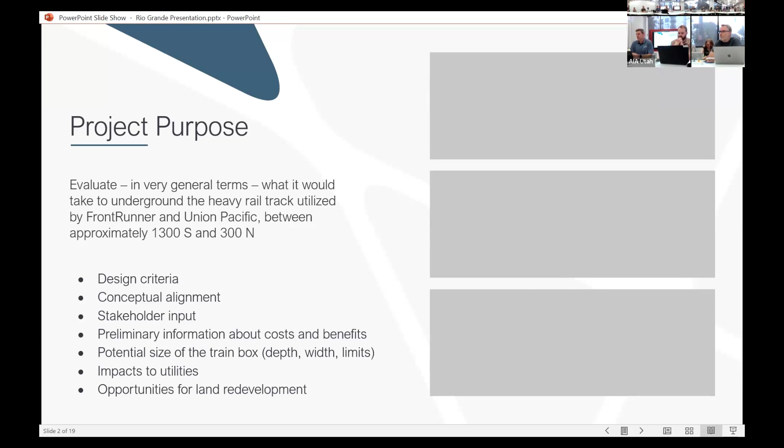The purpose of the Rio Grande Plan, originally as published, are stated here. Number one, improve east-west mobility. We know that that's an issue. Salt Lake City is working on that. They have some upcoming projects to help address that, not only through this potential project, but identifying a variety of improvements, whether it's grade crossings, enhancements to transit, active transportation, connectivity, et cetera, trying to bridge that east-west barrier that can be I-15 and the Union Pacific Railroad.

Another big purpose of this, if you've looked at the data, the number of pedestrian fatalities and serious injuries is at some of the at-grade crossings because of people trying to cross. They get impatient, they don't see the trains, and there's been some fairly catastrophic fatalities over the past few years, and that we seek to address, whether it's through this type of a project or other improvements that Salt Lake City will be considering through an upcoming grant they received called the Reconnecting Communities Grant.

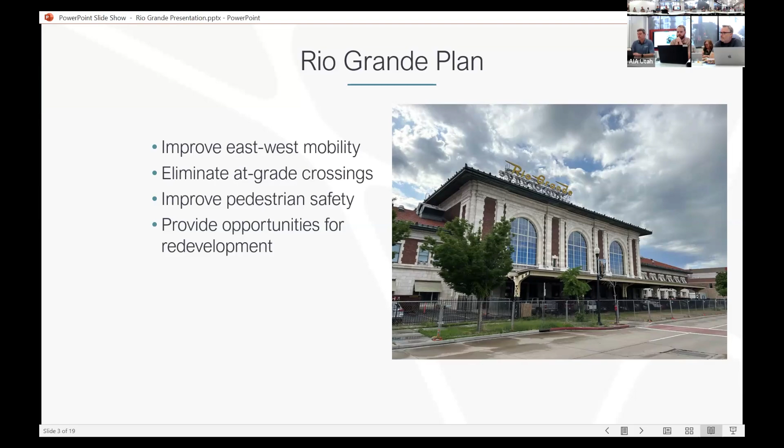As you are aware, the Rio Grande Plan did propose to what we call train box the Union Pacific and FrontRunner Railroad. And this is an exhibit from that Rio Grande Plan, starting approximately at 9 South, where the railroad takes a bend, entering the Granary District, et cetera, then approximately along 500 West. And then the Rio Grande Plan exhibit went to, I believe it was about 300 North, if I recall. Yeah, it remained below grade until about 100 South, and it rose up to meet at North Temple, so North Temple Station didn't have to be altered. Okay. The idea was to not interfere with east-west freight traffic.

Yeah, and so our analysis actually extended those limits a bit based on UTA and Union Pacific design criteria. So we go from about 1300 South to 300 North. So adding north and south, but that is to accommodate some of those other design criteria that the Union Pacific would require. You can see some of the new benefits here.

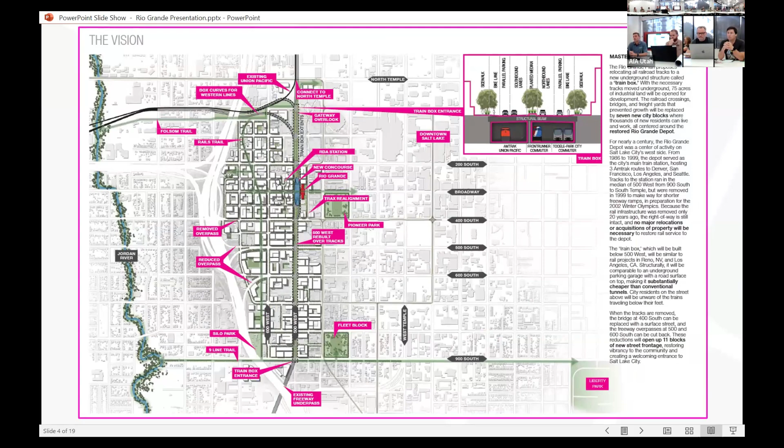A key component of the Rio Grande Plan is to revitalize or enhance the importance of the Rio Grande Station as a central transfer point between light rail, FrontRunner, transit, et cetera, and really restore that to its previous glory and heritage. This is another close-up of that Rio Grande Plan. You can see the historic rail corridor that we yanked out several years ago in the black, and then the pink is the current Union Pacific and FrontRunner corridor. And the Rio Grande Plan would largely restore the railroad back to its original historic alignment.

Well, which street is that black on? About 500 West. Okay. Yeah, so it's just west of the Rio Grande Depot right here, so it's the block west there. Proposed train box. And that's where the proposed train box. I actually didn't know that those existed, right?

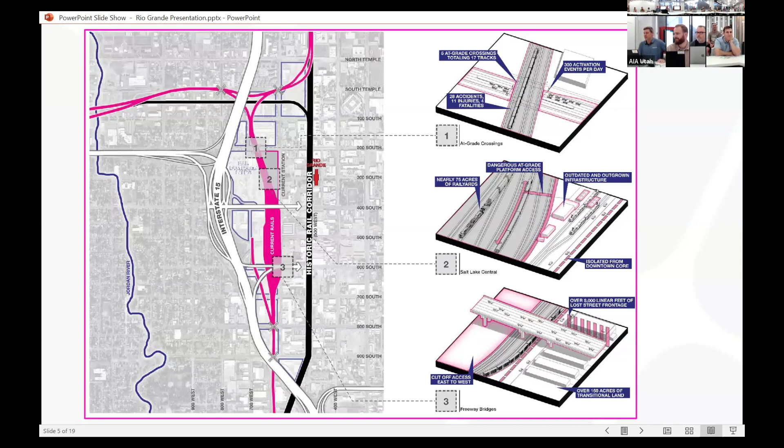Got it through the years. Okay. It was before I was born also. Okay. So, long time ago.

Some of the example projects where they've done this before are identified both in the Rio Grande Plan, and we did some follow-up example projects. People often cite the train box in Reno, Nevada, which undergrounded the railroad. There's also a similar concept in Southern California, the Alameda corridor.

And then if many of you have been to Denver, you've also seen that they had an investment there with their Union Station. So there's examples of how this has been done. Many of you cited in California how they took out a freeway, also contributing to reconnecting the communities. The purpose really is to bridge the divide that our freeways and major railroad corridors can provide. They put up a wall essentially that is very difficult to permeate.

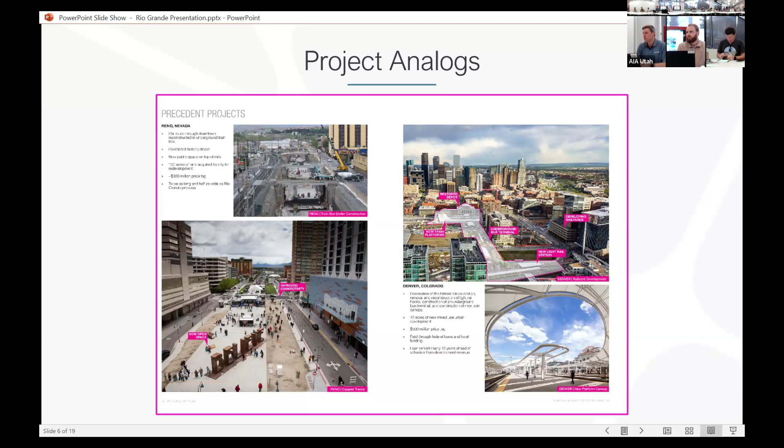A little bit more about what the existing conditions are on 500 West, where this corridor would be restored to. We divided the corridor into two segments: a north segment and a south segment, roughly divided there at the Rio Grande. Unsignalized intersections 9, signalized intersections 4. Residential access points 16 along the length of the corridor, commercial access points 35. At-grade railroad crossings 11, and then 8 overpasses or bridges.

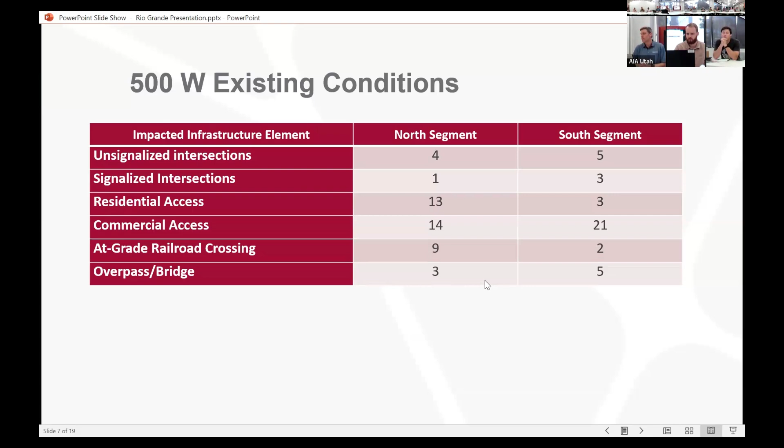These all need to be considered. It's just not as easy as digging a big hole and putting the railroad underground. We still have businesses that have been constructed with their frontage to 500 West. Unless we're looking to redefine those configurations, which is quite difficult, we need to figure out how to accommodate the access to them as well.

This is an overview of the north and south segments. The pink was the original train box limits. The orange is our extension to account for the vertical grade that needs to happen to be able to get a railroad up at the 1.1% grade, 1.5% grade that is required by the Union Pacific, so they can continue their freight movements, et cetera. You can see some of the other symbols there, the at-grade crossings, bridges, existing major access points, existing signalized intersections. We also have that for the south segment.

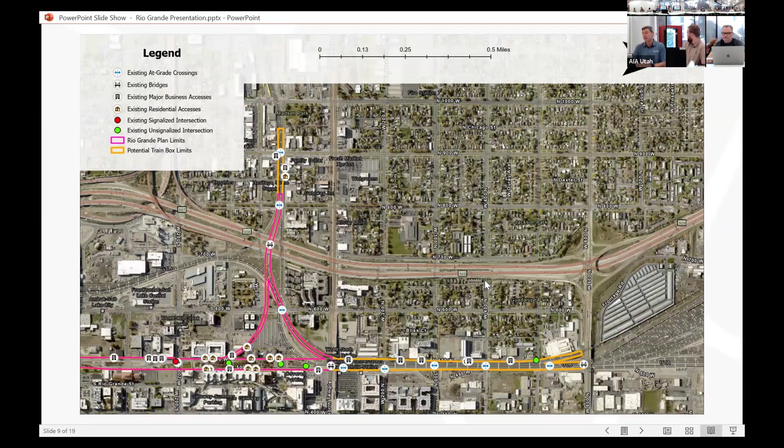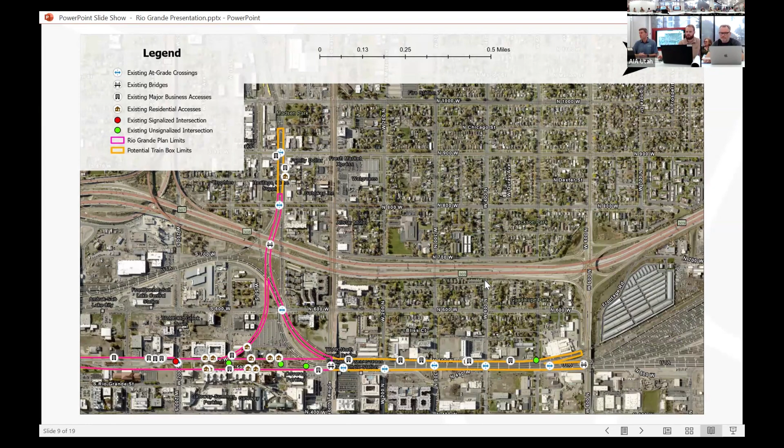Another consideration that we needed to accommodate is the train box would not just extend to the north, but it would actually extend to the west because of our spur line that is headed out just south of North Temple, accommodating freight traffic there. So you can see that pink is undergrounding to there, and then we come up grade where that orange line is showing.

We tried to keep the horizontal crossings basically flat with the existing street system, so we didn't have to go up and over, so you minimize the impact to the adjacent land. So it's basically straight across. If we can get the train boxes to that depth, then we don't have to go over. We can just go under with the train box.

Another key component I'll add to that depth is utilities in the area. When we talked with Salt Lake City Public Utilities, there's some really old, large sewer lines, water lines, gas lines, all sorts of things crossing there. And you just need to get deeper than those. They're still probably going to be in the train box when it's built, but you need to allow for enough clearance, so that pushed it deeper than probably originally thought as well. And we'll show you some exhibits that illustrate those utility solutions.

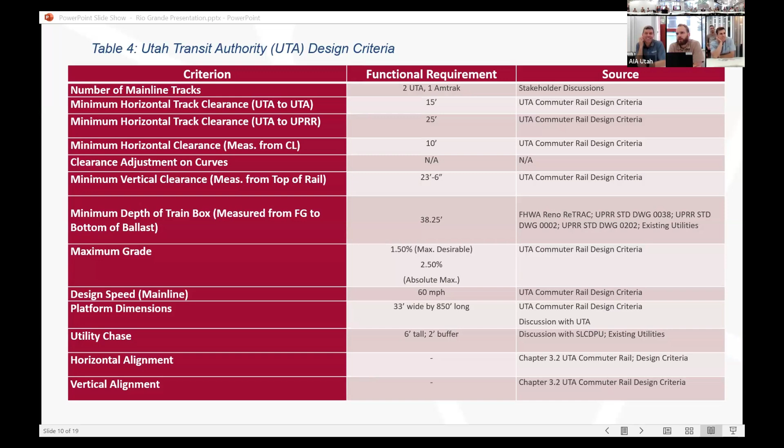Yeah, it's undefined, but it was brought up by Union Pacific. It was a concern. There was a lot of concern of, even if they were to store their trains like they currently do in the box, what the exhaust implications would be in a structure. You've got hot exhaust coming from these trains. Can they actually stay underground for prolonged periods and not cause problems to the structure?

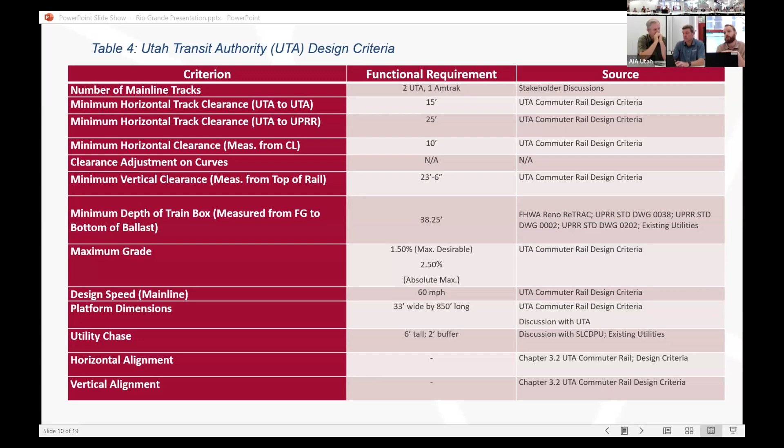As well as hazmat, what would be the plan if you were to move hazmat through the train box? What would be the cleanup protocol? It's not defined, but it was things that we discussed with Union Pacific, and it added to their skepticism and their concern for whether they were open to putting Union Pacific through this.

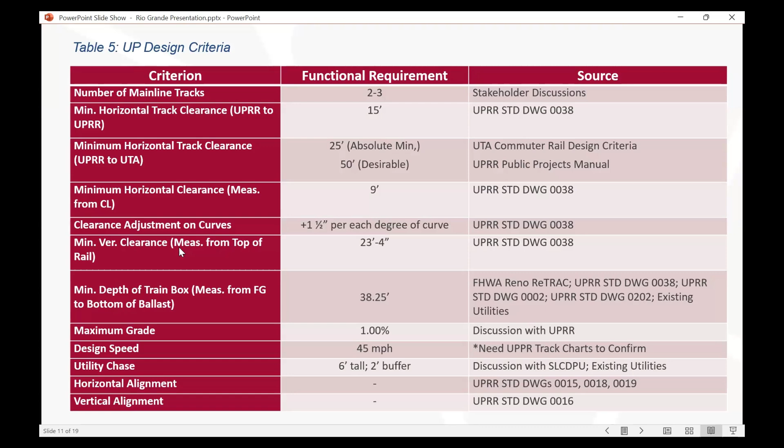I don't mean to belabor, but they already have a 10-mile one in LA. Just curious. Yeah, part of it too is that you're sharing it with passenger rail. The Alameda corridor, as far as I understand, is only freight. Oh. And you may be more familiar, but it's generally open, it's not capped. It has crossings. It's sort of open, but it's also capped in some places, same as Reno's. Same story, and Reno's does have trains.

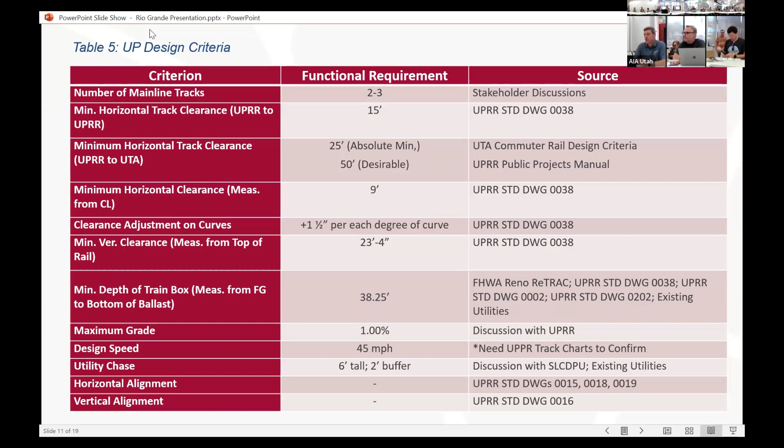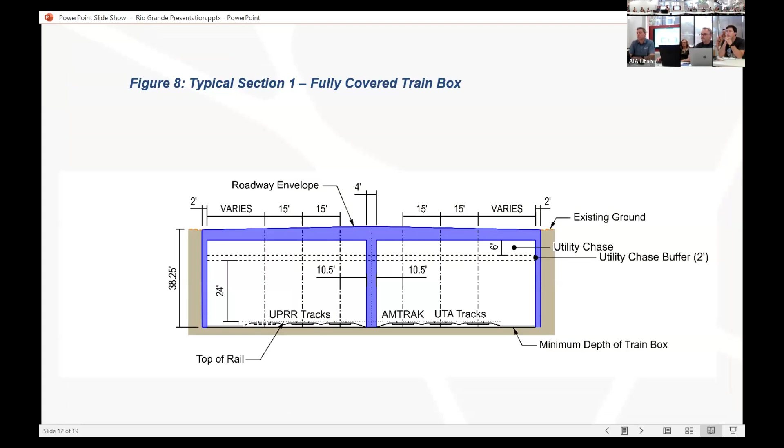You want to go through cross sections? Sure. You want to come along there? Yeah. So we're gonna shift to Theo, and he's gonna walk us up and down the corridor. We have a roll plot map. We didn't know how many people would be online or in person, so we brought a roll plot that, if you're wanting to look at it on paper format, we can lay out. Probably right here.

Sorry. Theo's gonna walk through it. And unfortunately, our plotter midway through had a midlife crisis. Yes, exactly. It's easier just to call somebody and have them plot it out, right?

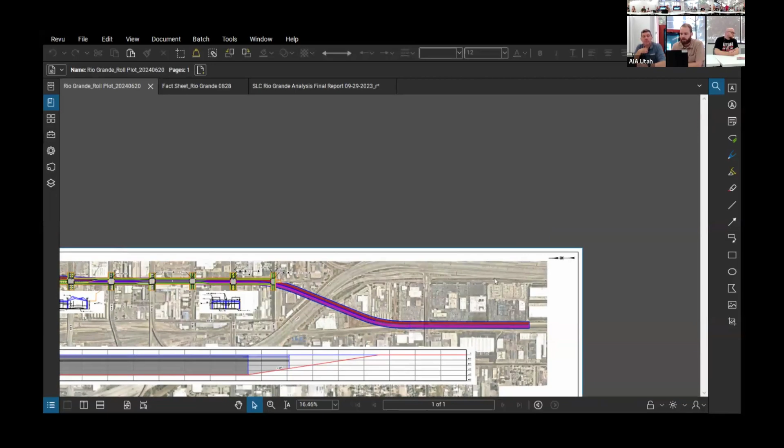So it'd be way down over there. Okay. So Theo's gonna share his screen, so we want to make sure we don't lose the online folks, walking through this. So we'll continue. Yeah, let's start on the south side, which should be over here. Yeah, sorry, north is to the left on this plot.

So again, like Brent was saying, Union Pacific, I think the profile in there actually shows 1.5%, but that was revised to 1%, which was a big contribution to the extension further south to past 1300 South. Unfortunately, that's the part where the plotter, so you guys can look here to kind of see the dark portion is open. Open train box. Tried to maximize that as much as possible, mostly for ventilation reasons. This is the less interesting section, but I can show you really quickly.

The alignments, the two red are UTA FrontRunner, the purple is Amtrak, the two pink solid are Union Pacific, and the dashed pink is future Union Pacific. So in total, 6 tracks. Those are center lines of the track. And you can see that one of the more strict criteria that Union Pacific requests is distance from third-party rail. So you can see the distance between Amtrak and Union Pacific is the largest there.

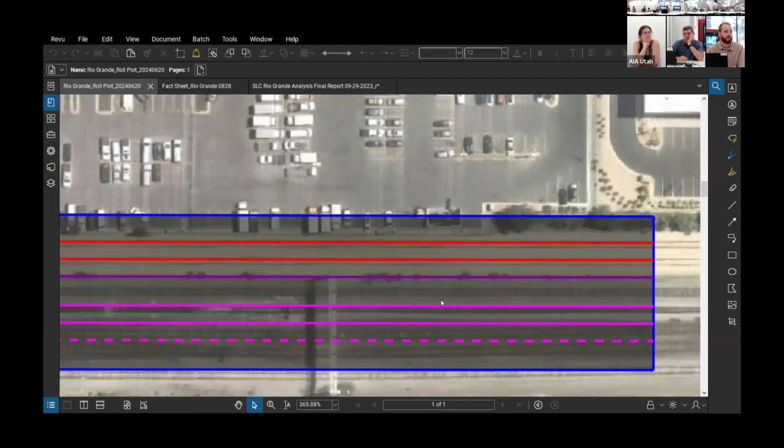And even what we show here is below their desirable amount, which is 50 feet. But 25 is something that they have in urban areas. So we thought it was fair to show that, because 50 just simply wouldn't. Well, you could put the future in the middle or something, so then it has 50 feet, if they want to go down. Yeah. Go ahead. I don't know, sorry. And that's their...

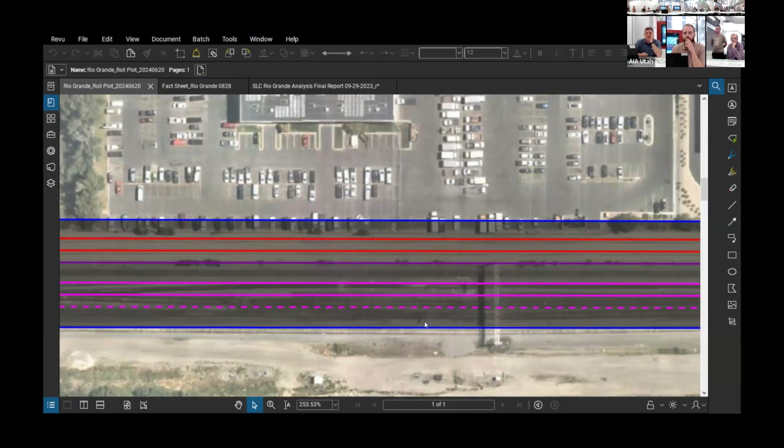And that's obviously their desirable. Are you seeing in the research that there have been exceptions made? Yeah. In existing, they have exceptions to that. Like we were saying, I think those come down to case by case, discussing with them. But they wanted it to be clear what their desirable criteria is, and that's what we have shown on the table.

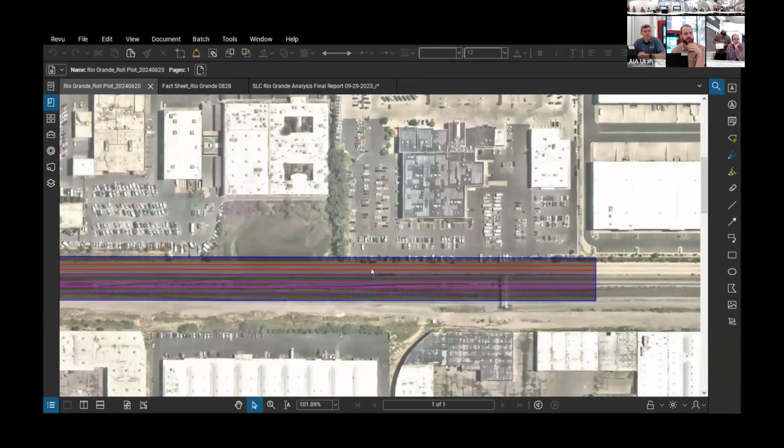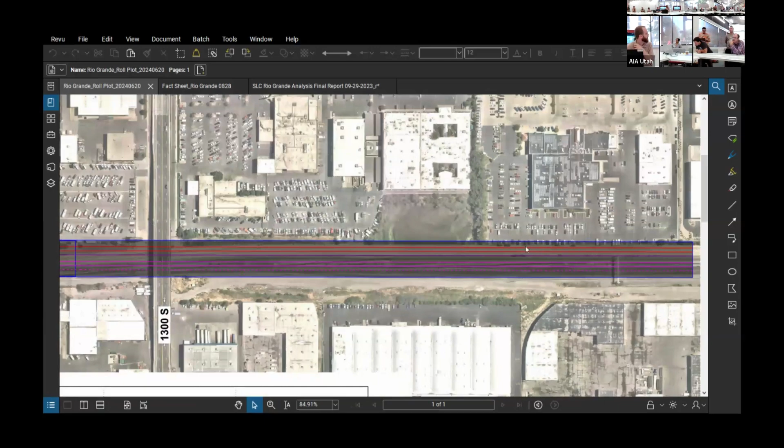Are your blue lines intended to stay in rail right of way, or is that? This doesn't show right of way takes. There are sections that go beyond existing rail, for sure. But for the most part here, with the exception of a few small parking lots, it works mostly in rail right of way. But it is very wide.

So as we go through here, this is kind of the first pinch point, that underpass under I-15. We didn't look super closely at what kind of reconstruction work would have to be done there, but definitely something would have to be done to accommodate that. Again, it is going down at this point, so there is a bit of clearance. It's the width of the abutments. Yeah, but you could theoretically, again, this goes into general versus specific, start with the box being smaller, and a separate I-15 revitalization could expand the box, right?

So as it approaches 500 West, we have some substantial property impacts here, which again are not really shown on this plot. There was just a lot to layer in, so I thought keep it as simple as possible. And this blue line right here indicates where it's full depth. So this is where it starts going down. This is where it's deep enough to be covered, but it's not covered in this section, and then this is when it's full depth.

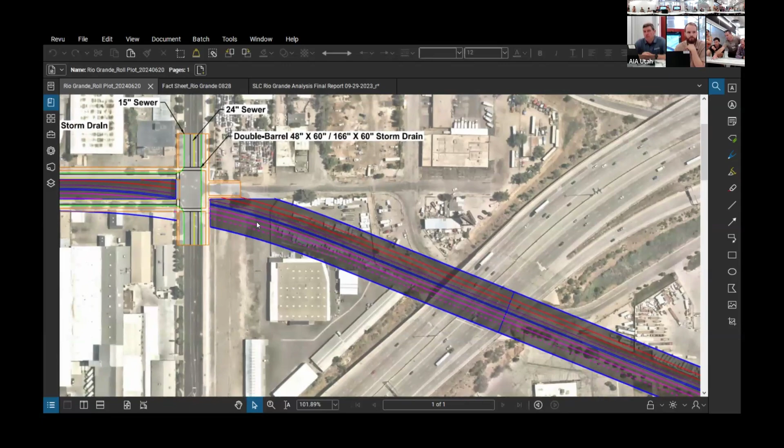And as we get into this section, you can see that lighter hatch, that white indicates at grade, like road grade. So these are those intersection caps we were describing. They would have to go over the box. And as we advance this, we wanted to maximize the amount of ventilation. So you can see the tracks are shown through that roadway cap. Each one of these would have to be reconstructed, similar to how they are on the Alameda corridor. We looked really closely at the way they had those intersection caps. And it's kind of similar to Reno, I assume, as well.

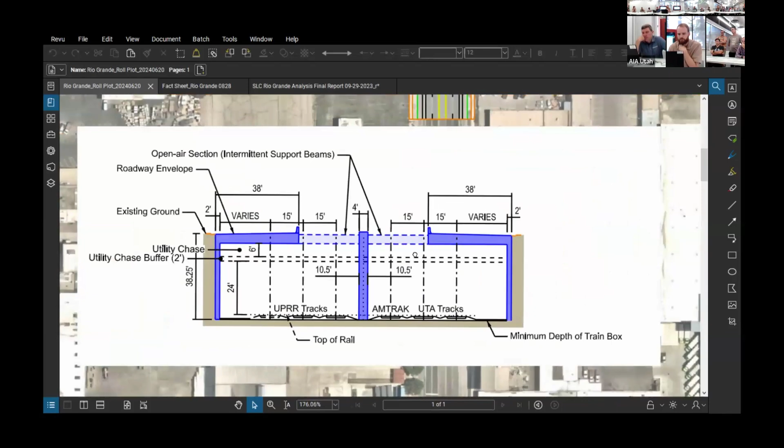These callouts are just drawing attention to some of the bigger utilities crossing in the area. Are those two intersections 8 and 900 South? Yeah, 900, 800, 700 South. So maybe pause, zoom in on that cross section. Oh, yeah. So real quick, 700 doesn't actually go over the tracks right now. So that creates a brand new intersection and connectivity between all these sides.

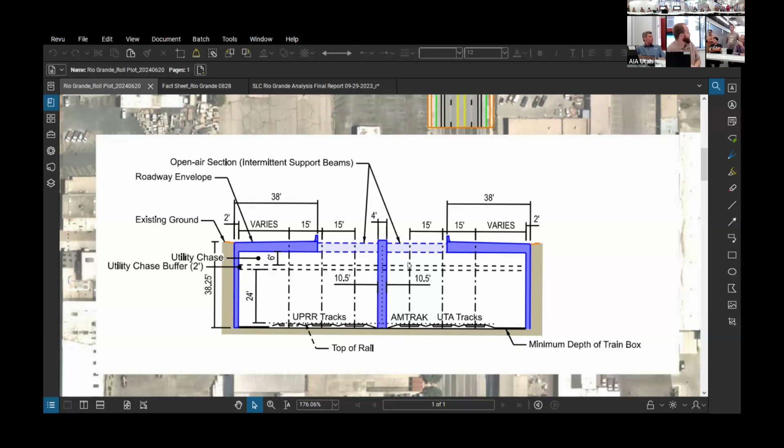So yeah, it's not a specific cross section at any point. It's kind of just general of what this kind of section would look like at the full depth. You can see there in the darker blue is kind of the roadway envelope of where we would keep existing traffic movements on 500 West. That dashed section in the middle is where it would be open air.

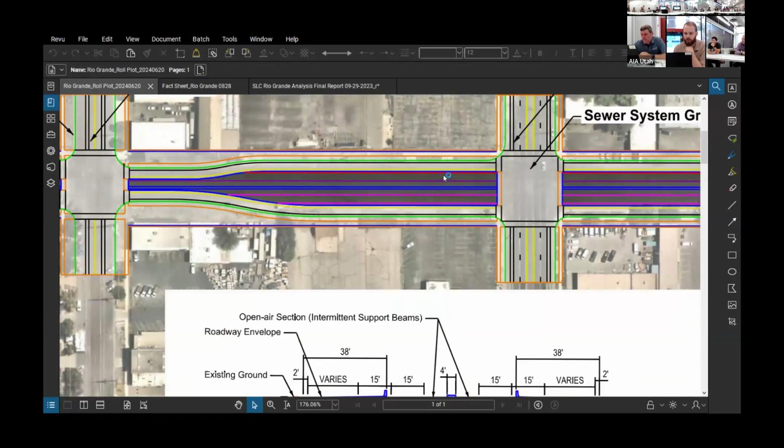We don't have it shown in the plot here, but it would have intermittent supports similar to Alameda to just structurally keep it stable. So it's not completely open air. It has pretty consistent beams across it that we wanted to kind of illustrate here. And then it really is less of a single train box and more of two train boxes side by side. The span is just too large to have a single box. So we have a large support there in the middle.

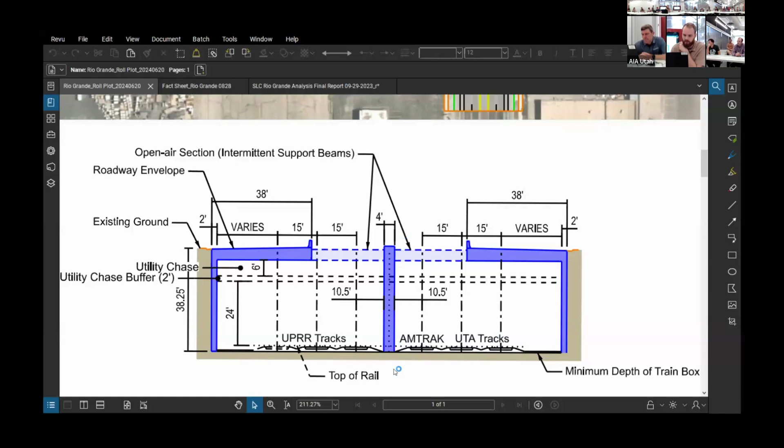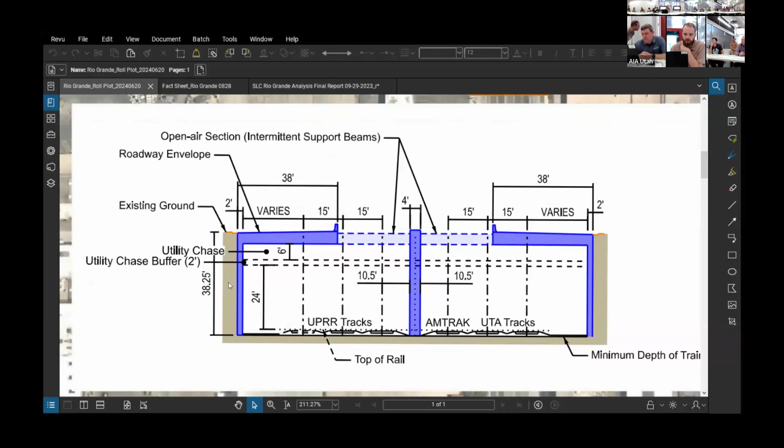And this generally shows again the two UTA tracks, the Amtrak, separated in some cases by a solid wall, but in other cases it would be open. And then the three Union Pacific tracks on this side, as well as space for servicing their tracks, to get vehicles down there. And then right here, as we were mentioning, we have what's called a utility chase, 6 feet. It's assumed that the large utilities that would need to span across the box would go through this section.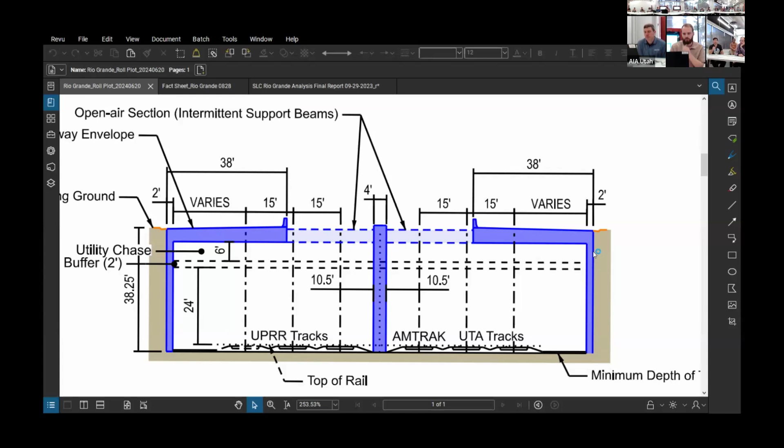They'd be put into pipes if they're not already, because there are some spots with really old brick sewer that would have to be completely reconstructed and put across the box. And that'll probably need to be reconstructed anyway in the next few years. So the Rio Grande Plan is again a project that takes care of a lot of things for the city. Yeah, and we wanted to add an additional buffer of 2 feet. So in total, there's 8 feet of room for utilities to span across the box.

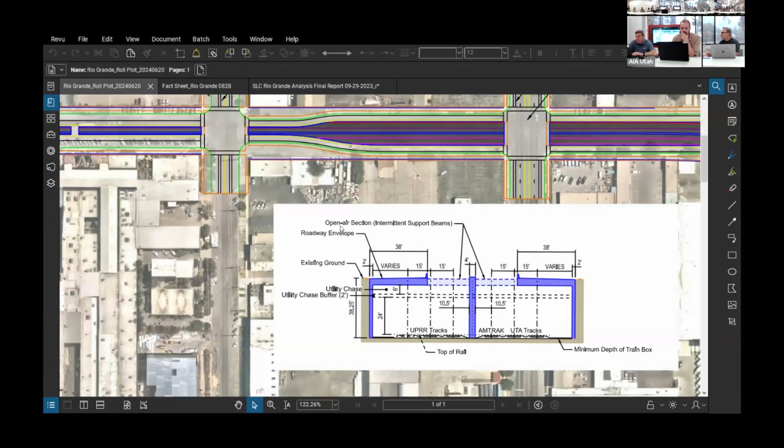How wide is this box? It's 120? Oh gosh, I don't know. Across? Span. It's a big box, that's why I'm asking. It's very big. You want to see it? Yeah, I'll find that. It varies quite a bit. You'll see it gets even wider. This is actually at its narrowest, or at least it's definitely not the widest. The station is worth watching. Yeah. So right here, we'll draw attention in the plan view.

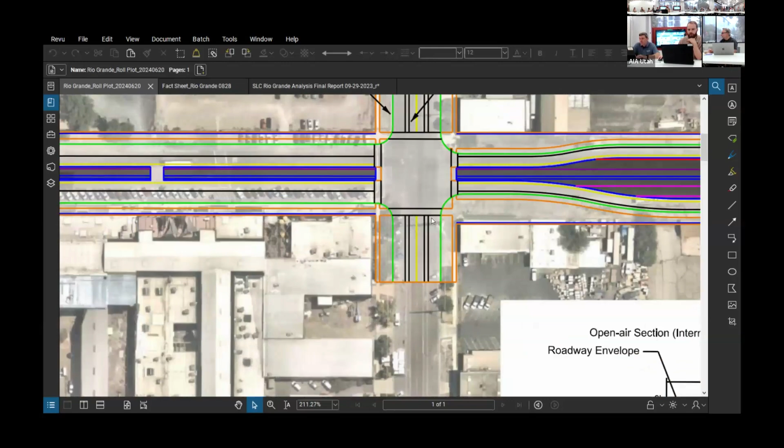This is the first concrete, because a lot of this is currently underdeveloped. Not to say that there aren't businesses operating here, there are, but the first big existing development is here with Industry. And that was one where we didn't quite know what it would look like, because it is in the footprint. You can see it gets a little narrower here, and that would require further design revision to see what you would do with some of these existing apartment buildings and commercial buildings. It gets more as you get closer to Gateway, et cetera.

Continuing north, we vary from 125 feet to 200. And again, as we've emphasized, that can be optimized once we get into detailed discussions with UP and UTA. Would that be the largest transit box in the country? I don't know, I would think so. There's a lot in that box. Alameda and Reno don't have that much in there. The Big Dig, I don't know how wide that is. Okay.

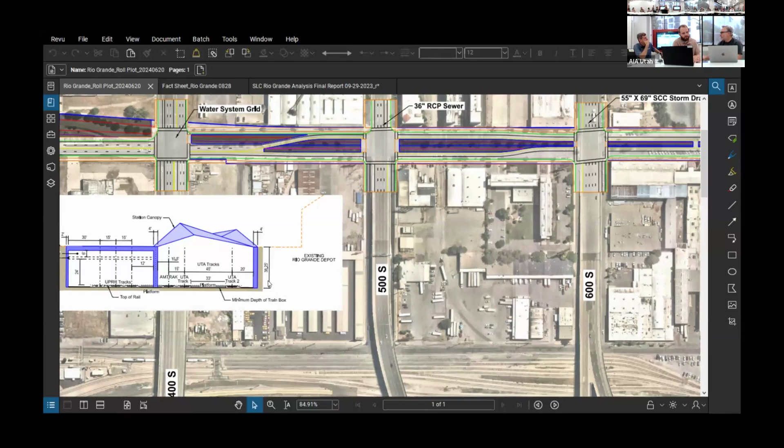I wanted to draw attention to these existing freeway entrances and exits. I know the Rio Grande Plan did identify those for reconstruction, to convert them to be at-grade entrances to the freeways. As part of this project, it was just outside of what we were looking at with the main line. So the assumption here is that they would stay as they are, but there's always the option, because that's a completely different project.

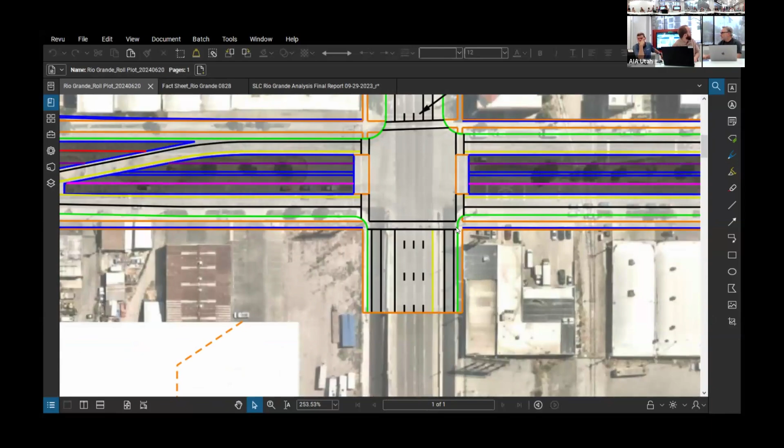So that does add a little bit of complexity with these intersection caps, because if you can picture where this is, they're already gaining elevation basically right here. So it's just a little trickier. But continuing north, to the station area, I'll go to that cross section, which you have on this flyer as well. This is again the widest section, just to allow for a center platform between both UTA tracks.

That went through a series of iterations with UTA of what they theoretically would want to see between the tracks. We had some spots where we thought maybe outside platforms would work, but considering the vertical circulation, we thought a wide center platform would be best. You can see Amtrak as well has a platform that is split between the UPRR tracks and the Amtrak track.

That's optimal. If we increase passenger capacity, then we could use the UP track. Right, and one thing that did come up when we were discussing whether Amtrak could share UTA's track is the platforms themselves are different heights. And their signaling is different. Yeah, so.

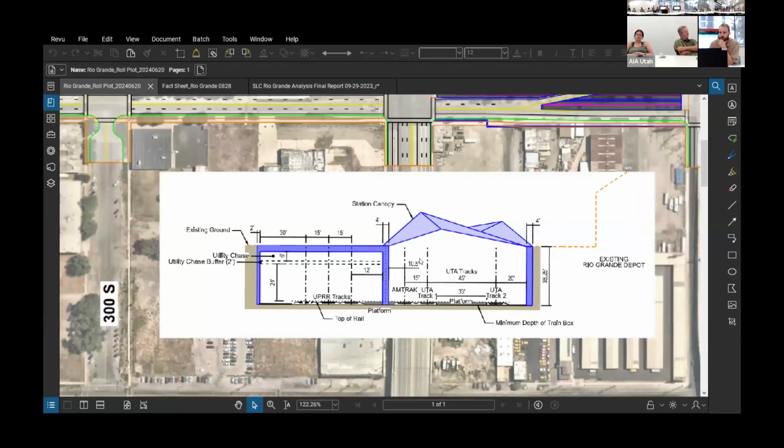Any questions at this? So with this cross section, would they just cross over the UTA track to board, or how would they board Amtrak if they didn't use the UTA track? Yeah, it would either be, whether they figure out vertical circulation, elevators bringing them down, or at grade, like grade crossings in the track itself. But the Amtrak is gonna be loading and unloading at the station. Yeah, but it does have its own platform.

The original Rio Grande Plan proposed elevators and escalators to both of them, so they could be above ground and then go down rather than cross over like they currently do in Salt Lake Central, which poses a danger to pedestrians. Right.

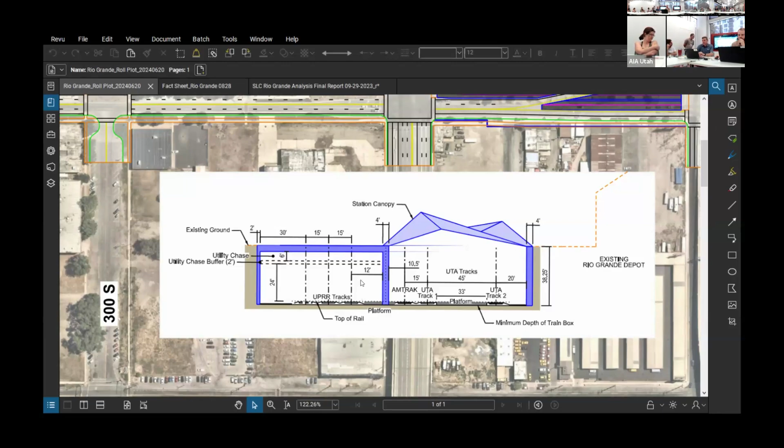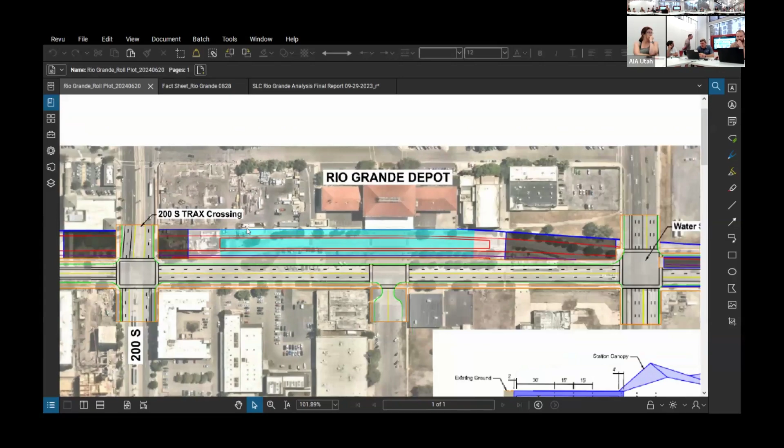So let's look at this in plan view. You can kind of see there the platform width. It's not showing what is covered by the road, so there's other things going on here, but yeah. You can see because of the turns that have to happen through here, it's not centered on the Rio Grande Depot exactly, but that would go through further revisions.

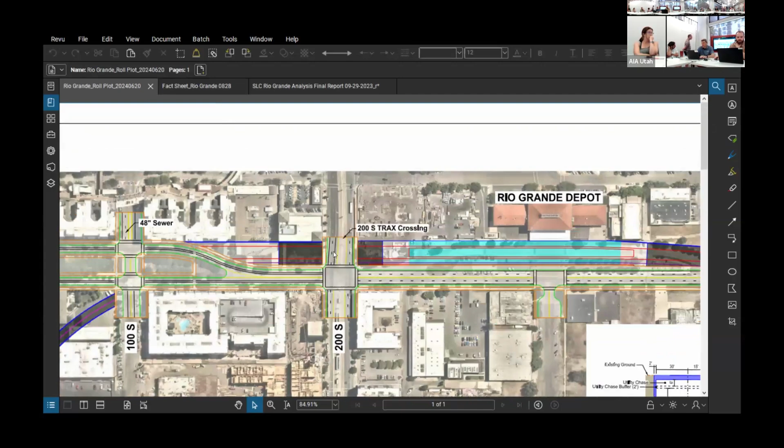As we go north, this is where we definitely get into the most impactful existing infrastructure and development with all of the apartments at the Gateway and surrounding areas. And it was a tricky one to think through, like, that's now become a really attractive linear park. And there's just no way to build this without eliminating that. But we're showing here a full cap through this section, both for noise reasons and to be able to put back that linear park, what was there.

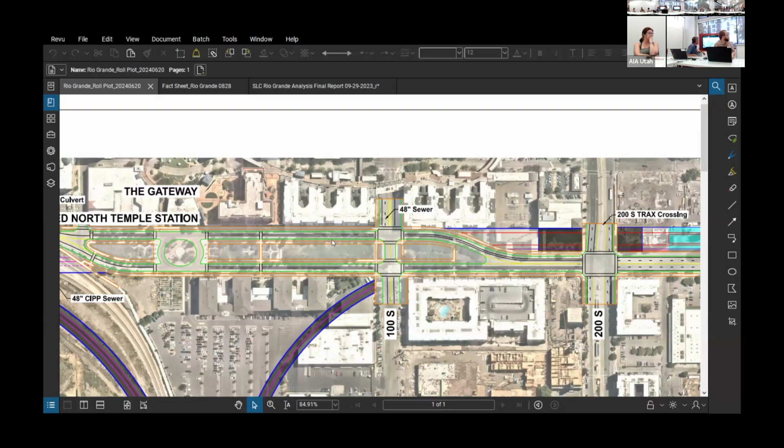This would definitely need further looking at, like the foundations of those buildings, how deep those are, how close they are to what we're proposing, etc. Keep going here. And this is that connection to the west that needs to be maintained. Are those businesses or are those apartments as well? Right here, yeah, this is businesses. I think it's a storage unit.

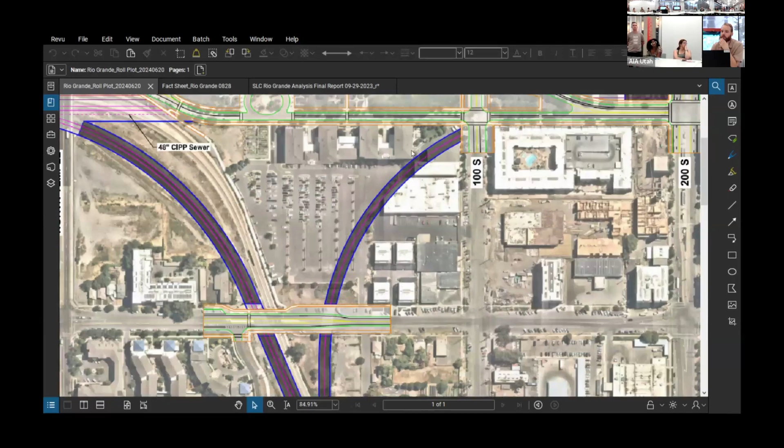This is a historic spur right here. You can actually see it. Not in this, but if you were to look, the building curves a bit. And really the only option would be eliminating these businesses to some degree or modifying them. Is it knocking out the Beverly or those residential? Yeah, with this, it's not knocking them down. Just these ones, the complex, and also there's a storage unit in there.

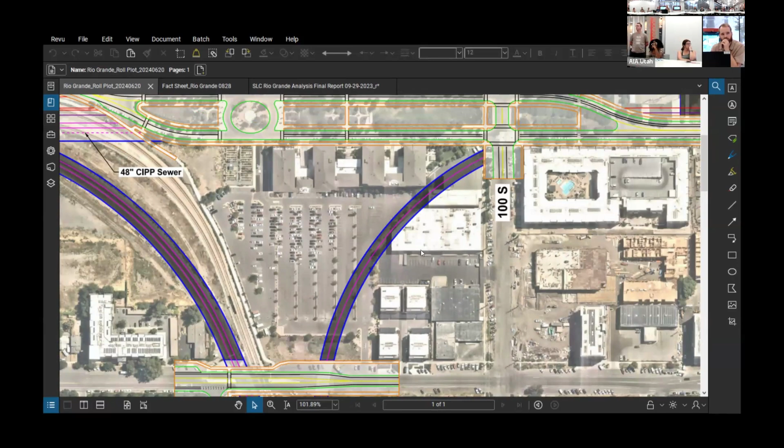But if I remember correctly from reading, there's impact on residential, but there's no demolishing of residential units. Right, I think these are the only two buildings that need to be eliminated. There may be a few small ones over on the south end, but yeah. Minimizing that as much as possible.

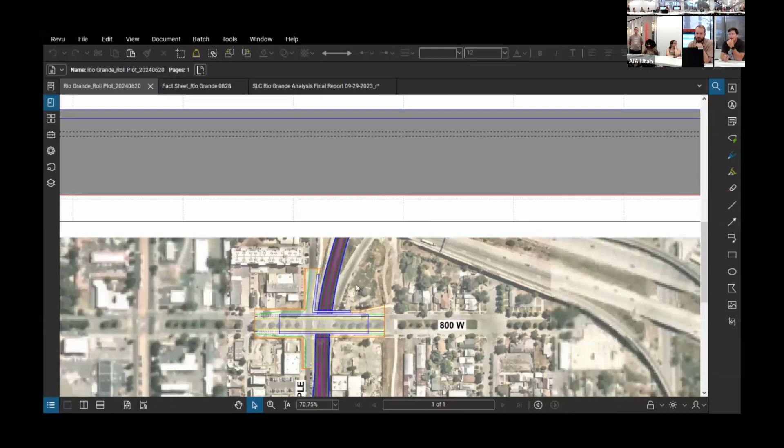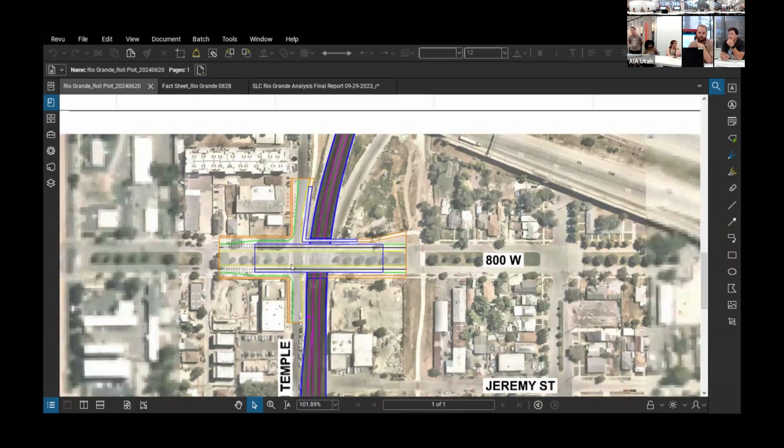So going to the west, really quickly, sorry, the profile gets in here, but something we did realize is as it's coming out of that trench, you no longer get the clearance that you need, so they'd have to actually build viaducts at 800 West, 900 West. And this one is able to be at grade, but that adds another complexity, that this isn't at grade because the train's coming out of the box. It actually has to be up and over. Same thing that happens at 300.

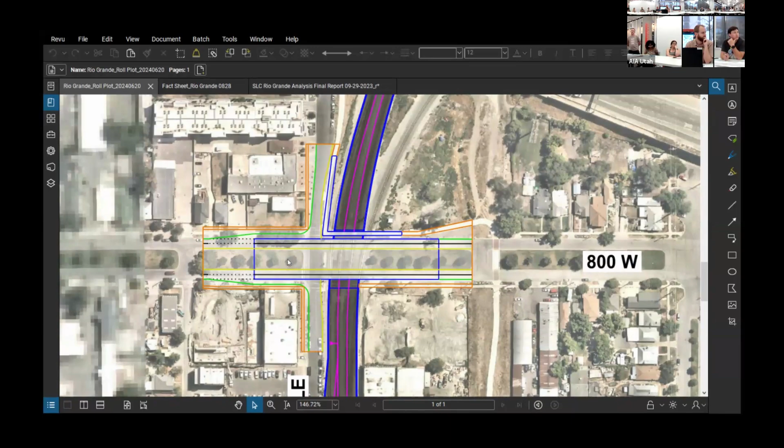Well, almost nobody's crossing using those spaces now. Currently, right. I turn around. I bike back and forth between all those, it's bad, because those are at-grade crossings of the FrontRunner for West. Plus, with the Power District going in there, it'll be good to have an easy access over.

And the last kind of big thing to talk about here is we had a lot of discussions with UTA about what to do with North Temple, both with its proximity to the new station, because by making this a straight line it does become quite a bit closer, and just, would there be a need for a North Temple station? That was on the table as well, but for the purposes of this, we decided to show where it would need to be relocated, were they to keep it.

Because at this point it starts exiting, you can't have the station on the grade, so it would have to be relocated fully underground, so you'd now have two fully underground stations if they were to keep both of them. A block from each other. Yeah. Right. And so I think in reality, once you look at the new light rail, the orange line and tech link corridor, things like that, you have a much expanded Rio Grande.

The reason they have two, it's the airport. Yeah, well, they felt like with the demand at each of those stations, they needed to distribute the demand. And now you get a much larger facility that can handle it. So you could hopefully consolidate those stations into a single station. My personal opinion, you should. Right? So North Temple does not become an at-grade crossing, does not lose its viaduct? No, keep that on.

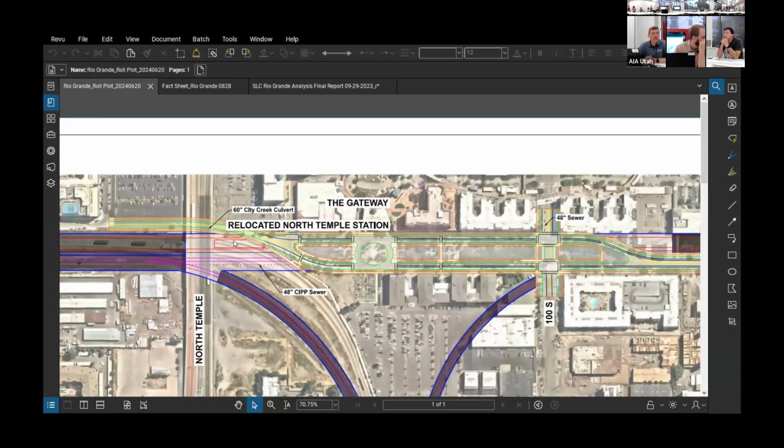That one really sucks as a pedestrian walking. There's always the potential to change that. Yeah, but you're trying for a minimum viable product. What happens to the central station? Just go away. Yes, it moves to the Rio Grande Station. Did you look at Sixth West at all as an alignment? I mean, it avoids a couple of these. Yeah, we focused on the original Rio Grande and getting it to 500 West, which is where the Rio Grande Station is.

And I'll just end this here, showing again as it's coming out, this aerial's out of date, more finished apartment buildings. It's just getting more and more constrained as time goes on, but it does fit within the existing rail right of way with some roadway reconfigurations and these new viaducts at 400 North and 300 North. And then it continues this way.

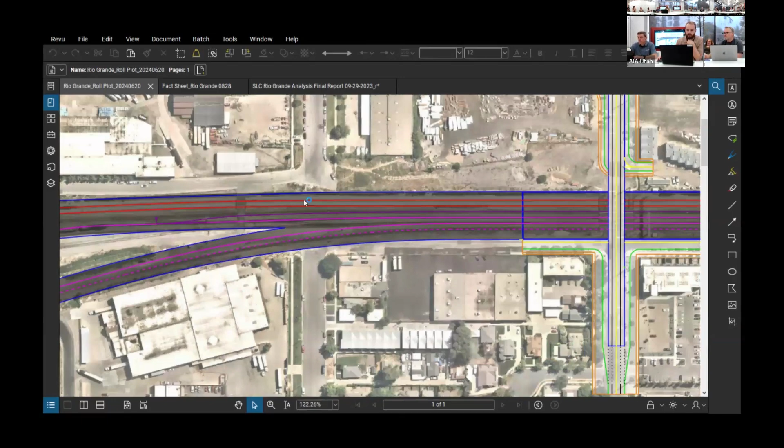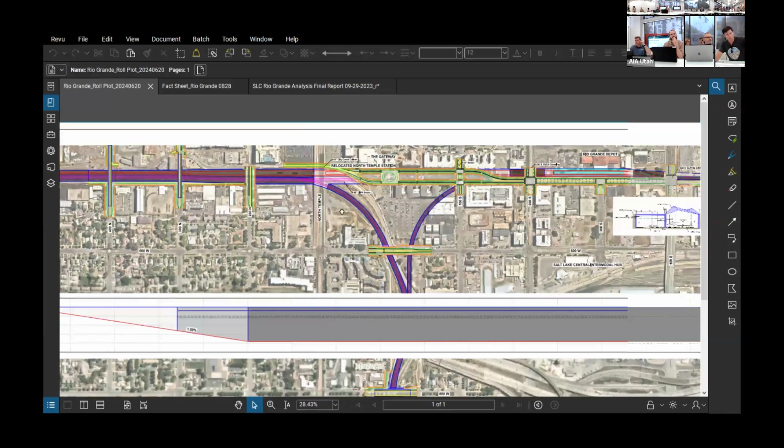So I had a question. From what I understand, you're assuming a uniform ground, right? When in reality there's a bit of change in the topography as we go along. So could it be possible, and I know it's general, that it actually gets brought back a little bit more or pushed out? Yeah, we don't have survey, we had to assume uniform. Got it.

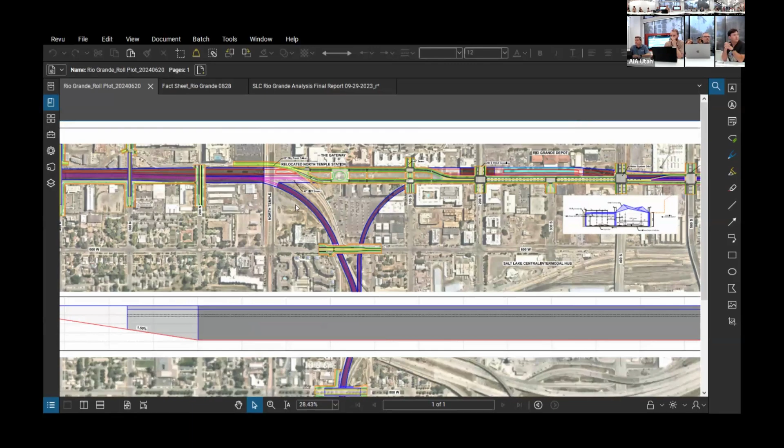How tall are the viaducts on 300 North and 400 North? Like North Temple size? They're just tall enough to get the 38.2 foot required clearance. But it's already on its way back, so it's going to split the difference. Exactly. That's why you can see 400 North is quite a bit longer and probably taller than the one at 300 North, because the train is higher at that point. That makes sense.

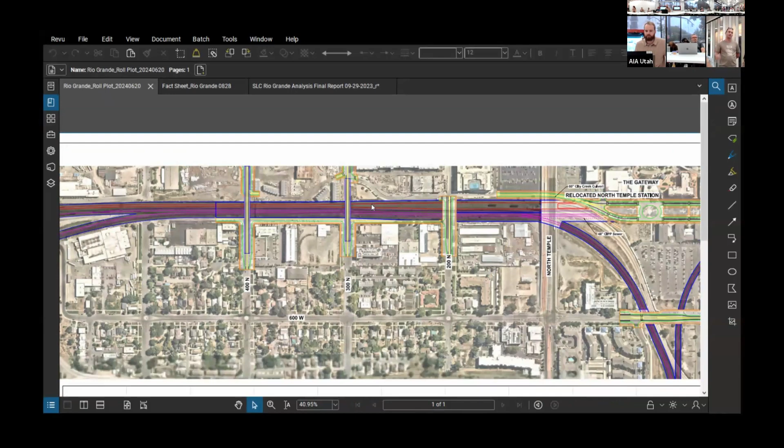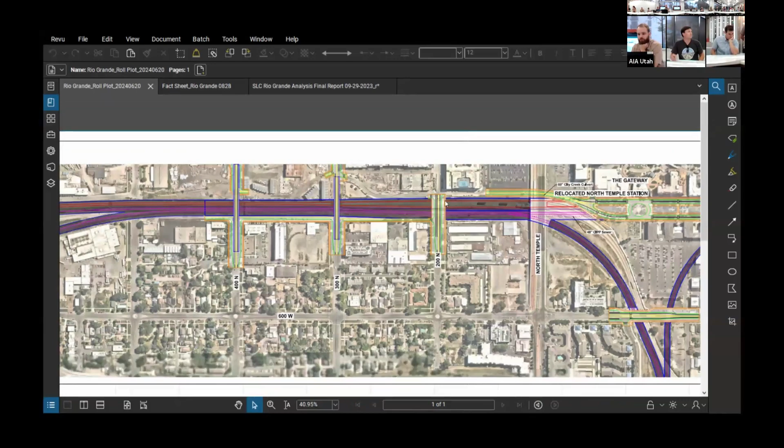It's great for cars, but for pedestrians it's not. Well, it could always change, right? But this is preliminary. So just be excited about it, right? No, this is awesome. It's nice seeing it laid out. I want this.

So I'll just wrap up. I know we had until 1 o'clock, right? Approximately. This is a summary of what those impacted parcels would, well, I just had it. How did I lose that?

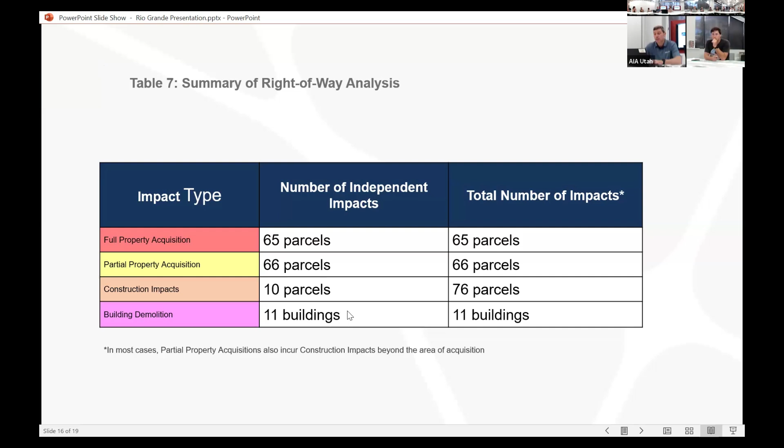Summary of what those impacted parcels could be based on this evaluation. Full property acquisition, 65 parcels. Partial property acquisition, 66. Construction impacts, where you're getting right next to it and have to do shoring or retaining walls during construction, 76 parcels. And then demolition: 11 buildings total would be removed as part of this concept.

The report identifies a variety of issues: rail coordination, continued coordination with Union Pacific, addressing access impacts. We have tried to bring the existing road system to provide access where it currently does. If there's redevelopment or reconfiguration of the business, that could be revisited and refined. Utilities will continue to need to be defined. Geotechnical, water table, environmental.

Railroad corridors aren't known for being ready to redevelop right of way because of all the leaking tanks and 100 years of stuff. So that will certainly need to be considered. Also, the redeveloped parcels that open up as part of this may not be eligible for residential construction because of those same environmental constraints. When UTA or Union Pacific does divest, there are often restrictions on ground floor residential. You can do potentially commercial or other uses, but ground floor residential is often not allowed because of the soil conditions.

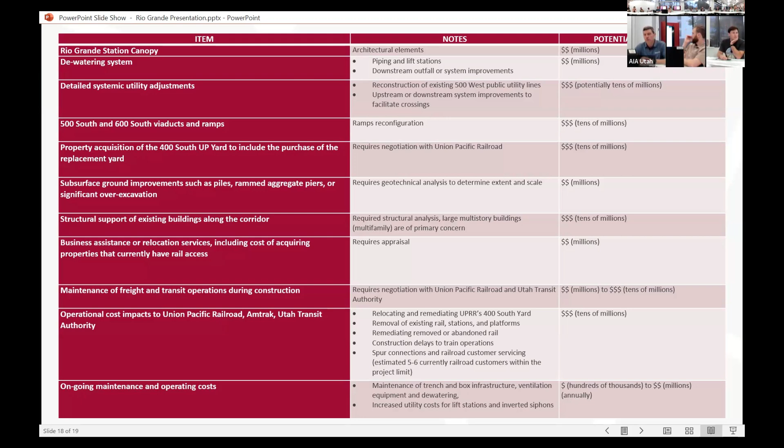And then there are all sorts of things we didn't look at, dewatering, or that we didn't cost. That's why, again, like Theo mentioned, the wide range of cost. So we have an estimate of $4 to $6 billion in total cost. Once it gets into the B's, it's hard to remember, 3 to 5 in 2020 dollars, 4 to 6 in future dollars. If you haven't seen our summary document, it's available on Salt Lake City's website, an overview one pager. And with that, it's 1 o'clock, so open to any questions.

About the cost, I saw you had a 30% contingency. As a person who works in government contracting, most of our line items have an additional percentage on that. Is there an additional percentage on each line item in addition to that 30% contingency? We have a 30% contingency on the summation of the construction costs. Okay, but nothing else on each line item? Not on each individual line item. Sometimes there are wrong items that go in; it depends on the bid process. As a concept is developed, 30% is quite large, especially for a $4 billion project. In the next generation of concept design, you would hopefully reduce that contingency down to 5 or 8%.

I think my biggest thought is, we're doing a lot of redevelopment in Salt Lake, the convention district, and also the Rio Grande, and I'm hoping that even though this is very preliminary, they're not going to do anything that will make this more difficult, but are also looking at how we can plan ahead if this does go forward and make it easier. Right, absolutely, and they're cognizant of that. There are redevelopment projects for the Rio Grande area, now called the Rio Grande District. And there's the green loop coming through this corridor, and I think our concept is compatible because it's underneath all of that; we would want to design how we can maintain both of those functions.